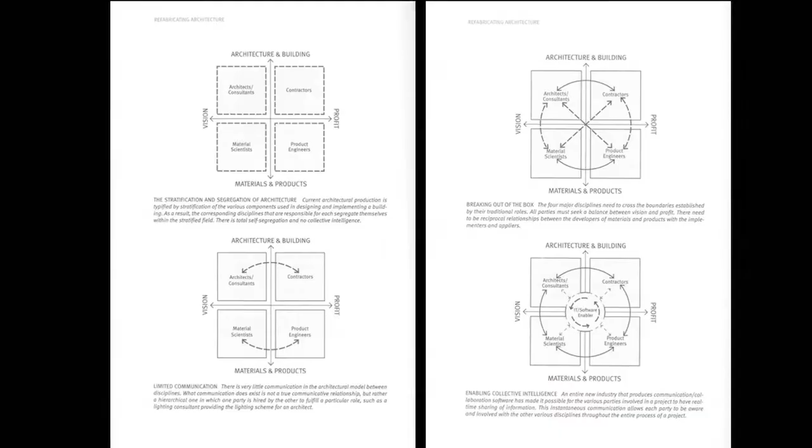So I really urge you to read this book and study these diagrams. They're hard to read, but the one on the upper left-hand corner is basically how it is now.

And the one in the lower left-hand corner is kind of why no one's talking to each other.

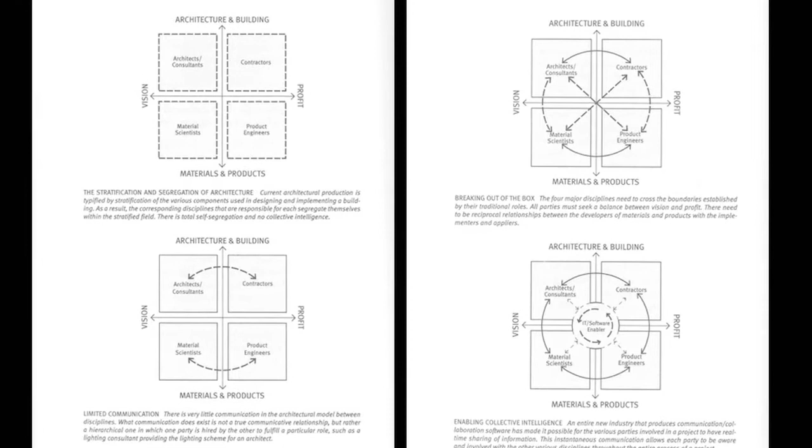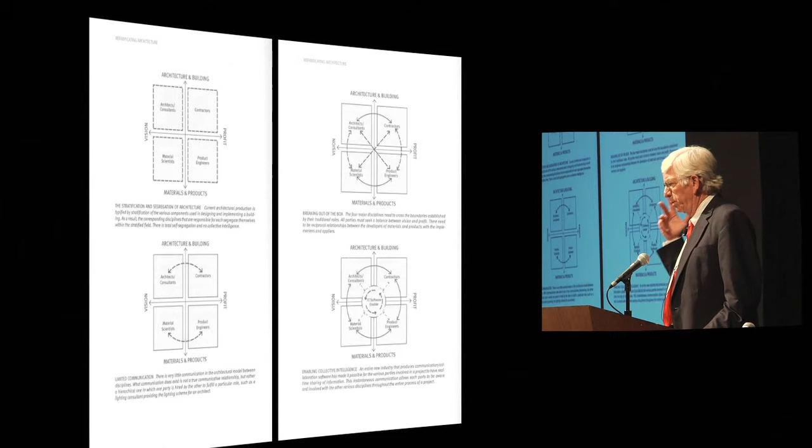Kieran and Timberlake looked to the automotive, shipbuilding, and aviation industries, at how they build prefabricated sections of airplanes and ships. Cars come to the assembly line in chunks, and there's no reason buildings can't come to the job site in chunks too. We're limited by trucking, highway widths, and bridges, but I'll show you things being done with prefabrication where we're making a big change.

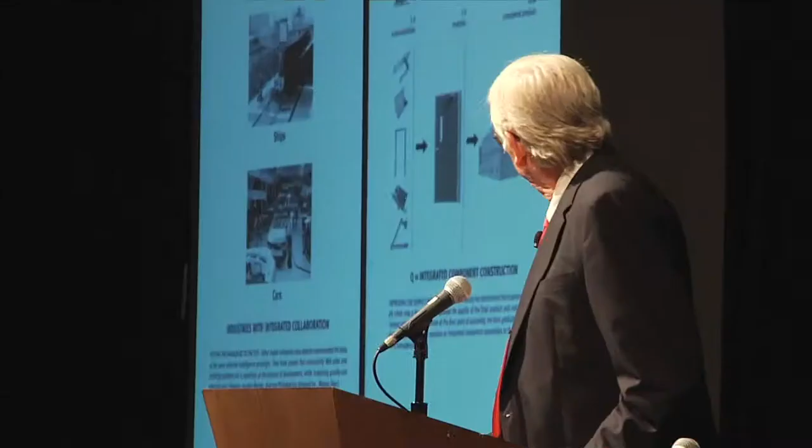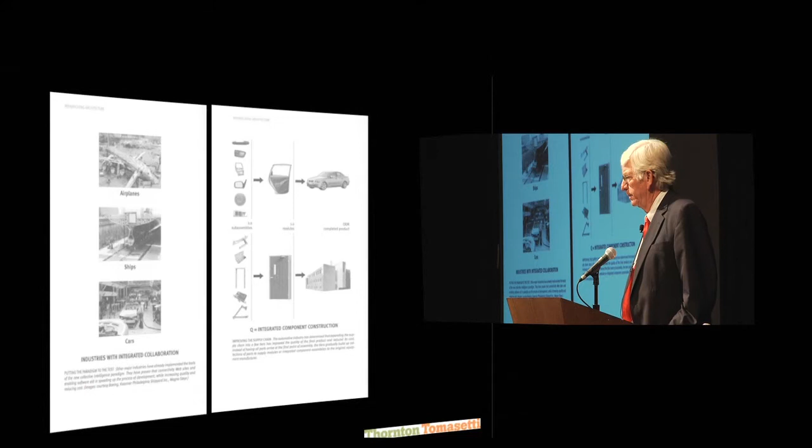This shows how, if you think about the doors on a car, they're all made somewhere else, and everything's in the door. At the assembly line, nothing happens with that door except it gets hung on the hinges. If you look at mechanical contractors, they're prefabricating bigger and more pieces of the MEP sections and bringing them to the job prefabricated.

EMCOR, a $6 billion a year company, is beating open shop contractors in Southern California by using BIM and prefabrication. They're able to beat hard bid against open shop contractors, a union contractor in Southern California, all because of their prefabrication using three-dimensional modeling, CNC downloads, and all sorts of cuts.

You should read this book too if you want to see how bad the construction industry is: Broken Buildings and Busted Budgets, by Barry LePatner. He explains how in the process, certain players in the construction team have more information, and the guy who has the least is the owner. As a result, the system's broken. It doesn't work. This is an interesting video.

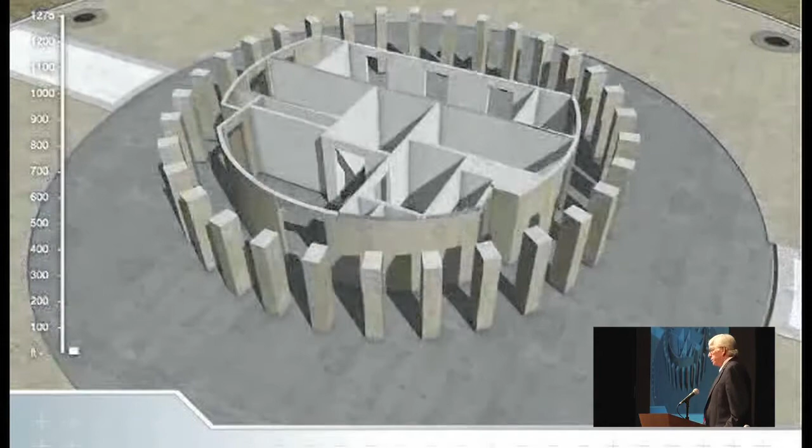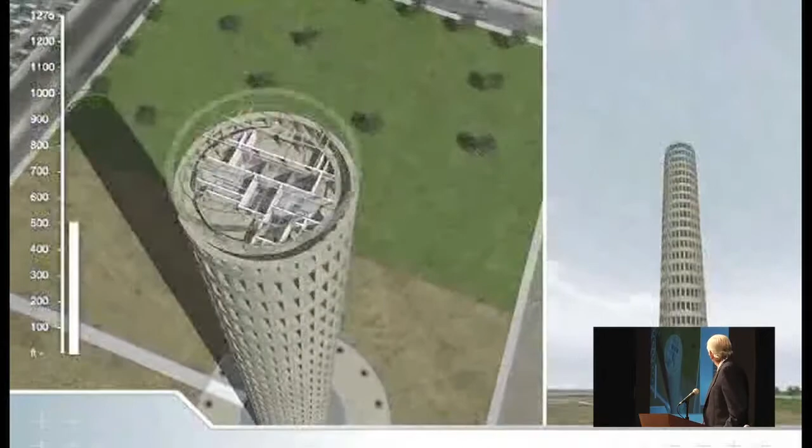This is a system called the TTG system. Slip-form concrete pours, elevators, stairs, everything goes in as it's going up. Vertical risers go in as it's going up, at a rate of 24 feet a day.

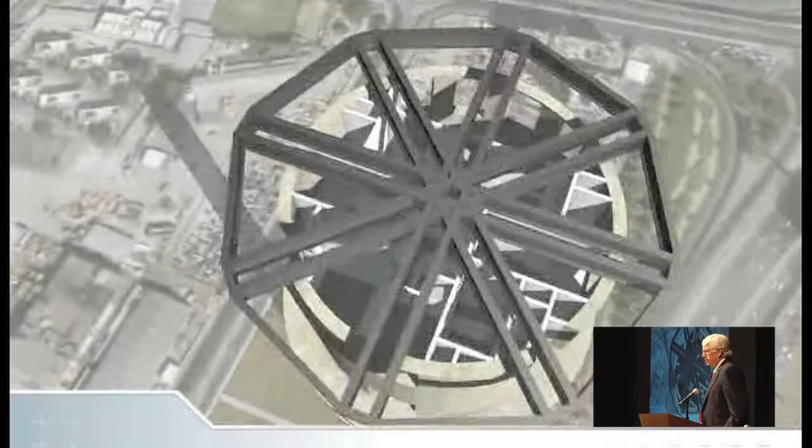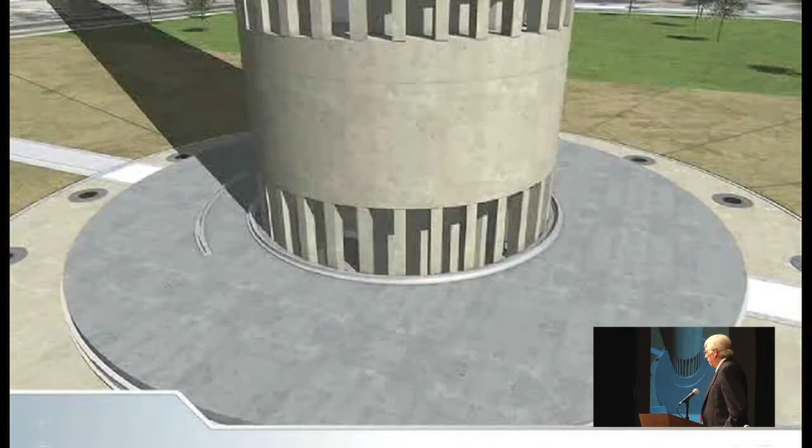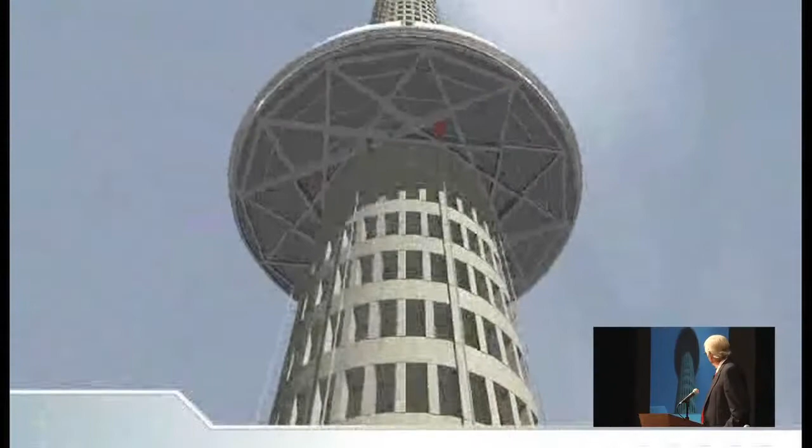Then we mount 6, 7, 8, or 10 strand jacks on the top of the building. Steel all comes together on the ground. A Macton turntable goes on every floor, and each floor rotates. Concrete, exterior wall, and up we go.

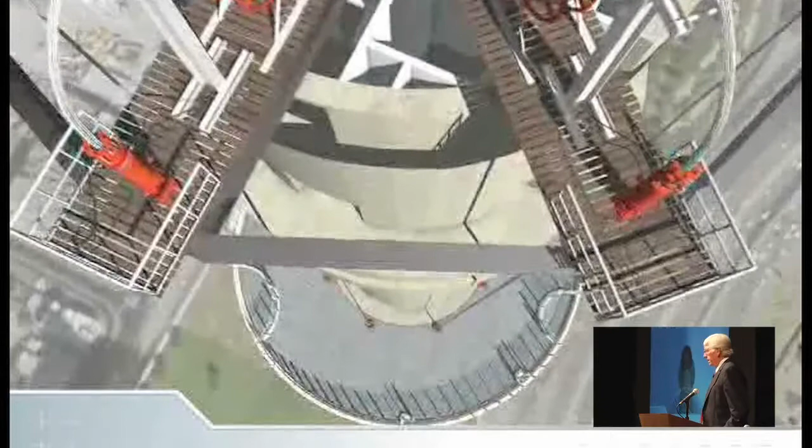No tower cranes. All steel erection is done no more than 6 feet off the ground. No tie-off. The assembly rate of putting the steel together is 5 times faster than conventional, and there's no hook time.

This was conceived back when everybody had money. We were going to sell the units at $35 million each. Each owner of a floor would be able to control their own floor, and they could watch the sun come up in the morning from their master bedroom, and the sun go down from their cocktail lounge.

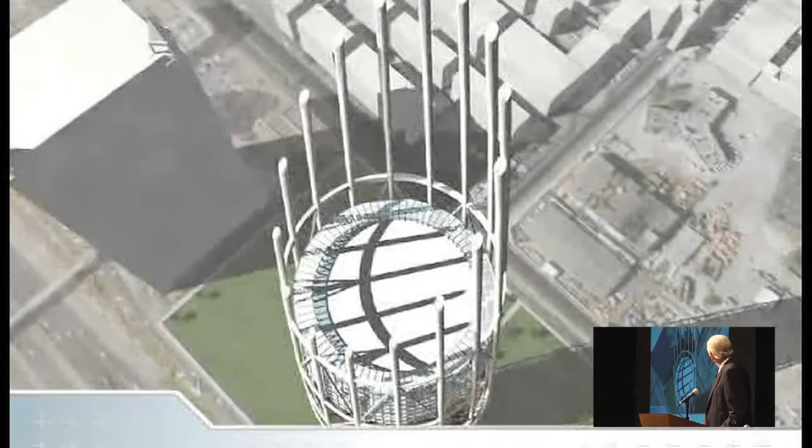There's a lot more in the video about the architectural finishes, but this was a real project. Hochtief and Turner financed this video, and we basically went to Dubai and tried to sell the system, but by the time we got there, the bottom was out of that market.

But the fact of the matter is, if you just think about the process, why not put together the floors on the ground and lift them? I've got other slides here.

I think one of the most progressive companies in the United States is Cianbro, and I was talking to Chicago Bridge and Iron last night. Where are they, CBI? Back here somewhere? And they're doing the same thing.

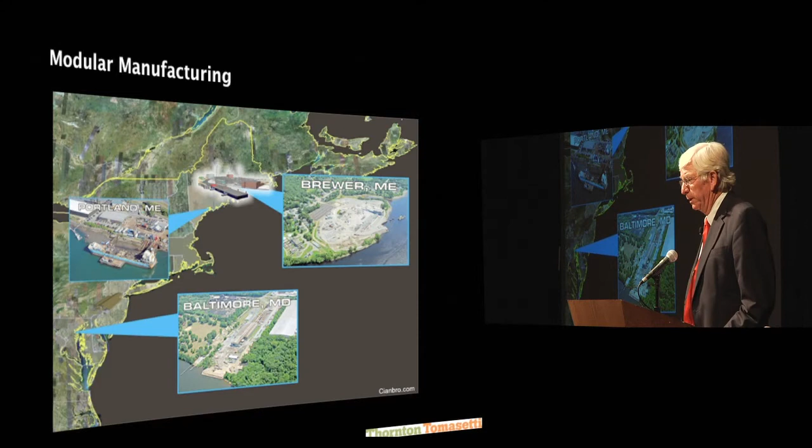Cianbro is prefabricating everything in their fabrication facilities on the water. They're in Brewer, Maine, they're in Baltimore, and there's another one I can't quite read from here, but basically they're prefabricating industrial facilities, again in chunks.

And the project I'm really impressed with is shown here. I'll go quick through this. Obviously, steel companies that build bridges and can float them in and replace the bridge overnight are the optimum example of prefabrication and modular construction.

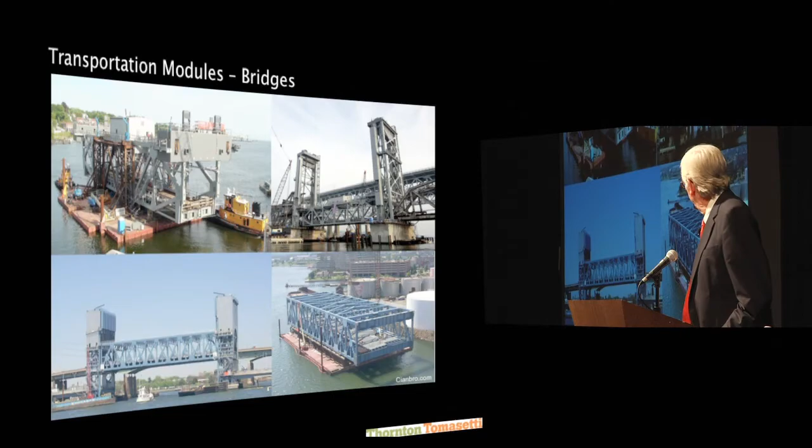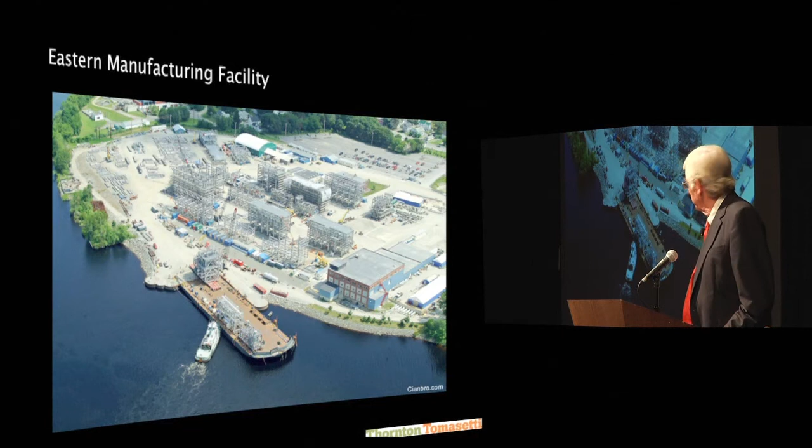We moved to Brewer, Maine, to an old paper plant, which had put 600 people out of work. Cianbro went in, tore down the building, and set up a modular facility. This is for the Motiva project down in Port Arthur, Texas, with Jacobs and Bechtel. They prefabricated 52 800-ton units completely in Maine and barged them all the way down around Key West and up into Port Arthur. Just amazing what can be done.

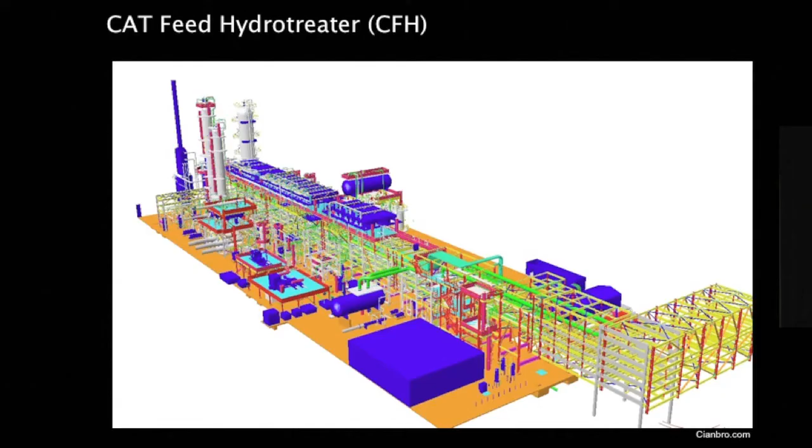Again, all this modeling, the fabrication, all the piping, everything done, and I'm sure there are other petrochemical and industrial companies doing some of this as well.

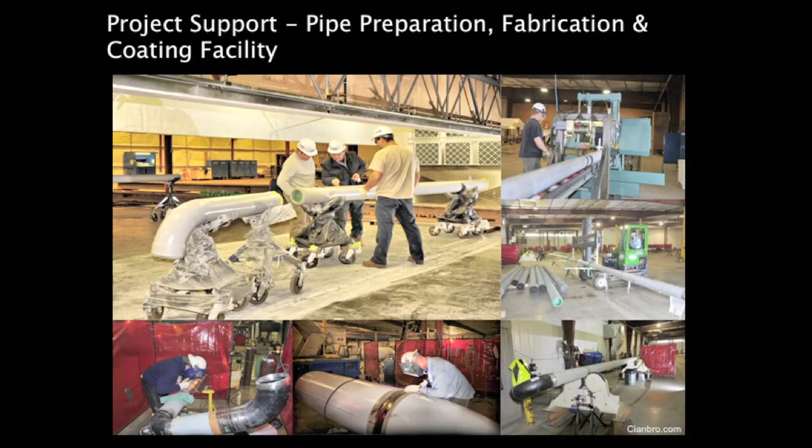And then putting them on the barges, 100-foot by 400-foot barges, 20,000-ton capacity. So if you've got 800-ton modules, you can figure you can put at least 2 or 3 of them on.